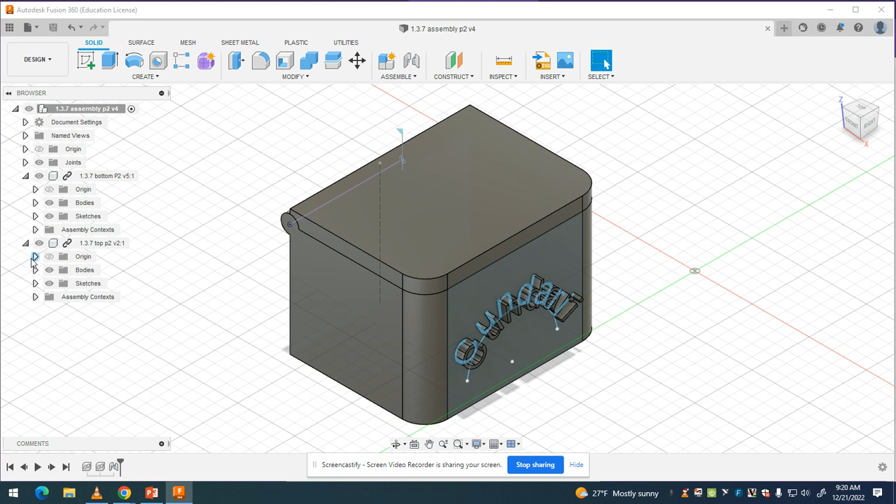All right guys, so what we're going to do here is, I can turn off this sketch. There we go, that looks better, right? Just turned off some sketches. So we're going to finish this up.

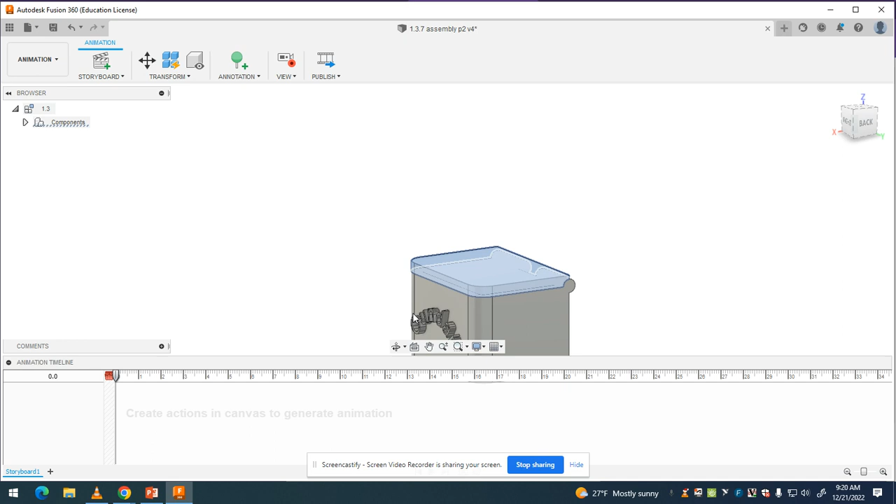So I want a technical drawing with an exploded view in it. That means something. So now that you've assembled everything and you're looking good, you're going to go over here to where it says design, that drop down, and you're going to go to what's called animation. I'm going to click on the house over here so that it zooms in and makes everything look pretty, because whatever direction you have this in is what it's going to be when you make it.

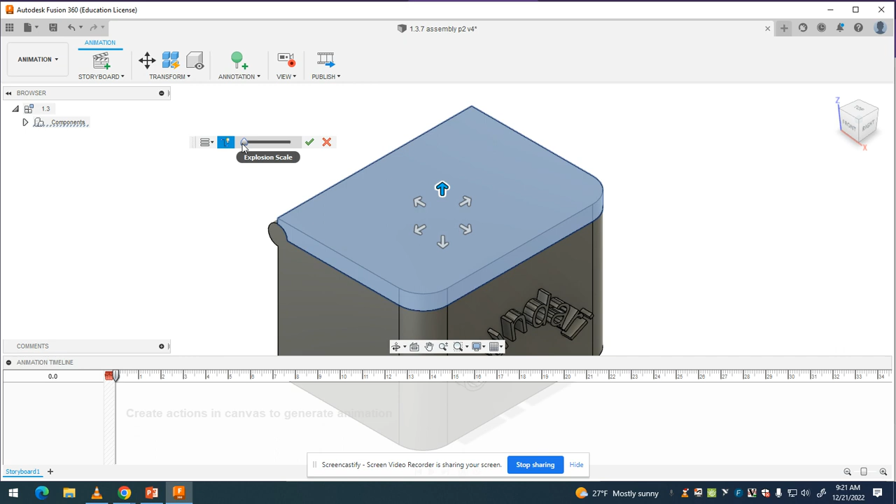You're going to go up here to this transform and down to manually explode, or manual explode, and you get these arrows. Now we want this to go straight up, so I'm going to click on the up arrow. And then I'm going to go over here to this explosion scale and zoom it up. Zoomy. And then hit check.

So if you had a bunch of parts, if you had screws and nuts and bolts and whatever, you would have all that stuff kind of sticking out. You could see where things go together. That's the point of an exploded view.

I'm going to hit save. This is important, you must hit save. Okay, now if I were to go back into design, everything would look normal, right? And then when I go to animation, I can see that that's where that's at.

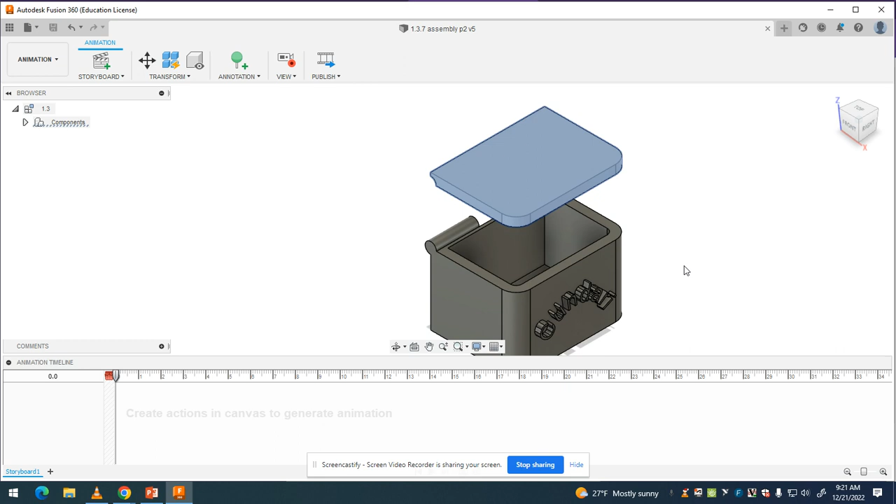So now I'm going to go here to drawing, and I'm going to say drawing from design. And if you did everything correctly earlier on in the year, you're going to come here and instead of from scratch, you're going to have your demo sheet option. If you don't have it, just do the from scratch. Okay, hit OK.

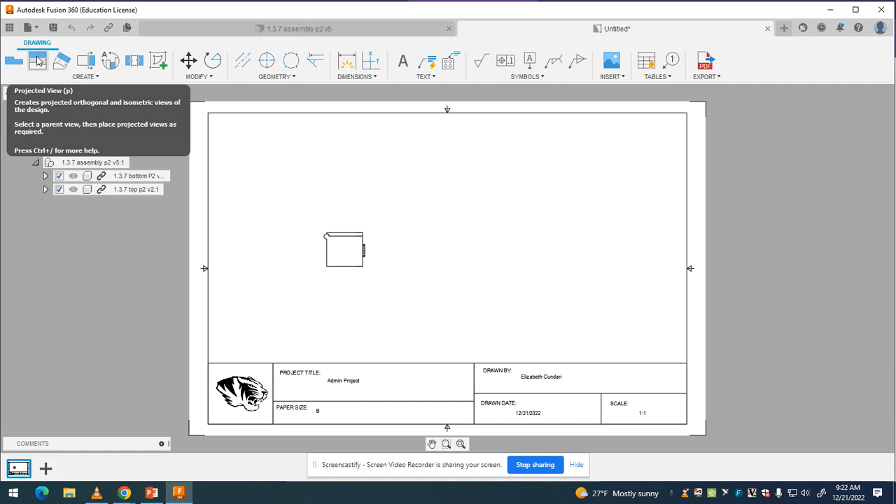And it brings in your drawing. Now mine has, it brought in my assembly right here. I'm going to go over here to, if it's just your base view and you have to click it down, just click it down. Go to projected view. I'm going to click on this original and then go straight up and then over.

I want to make sure that the one that goes over, I'm going to hit escape on my keyboard so that I'm done with that. I want to make sure my name is the one showing. So if it happens to be in the other direction, go left, okay? But I need the 3.

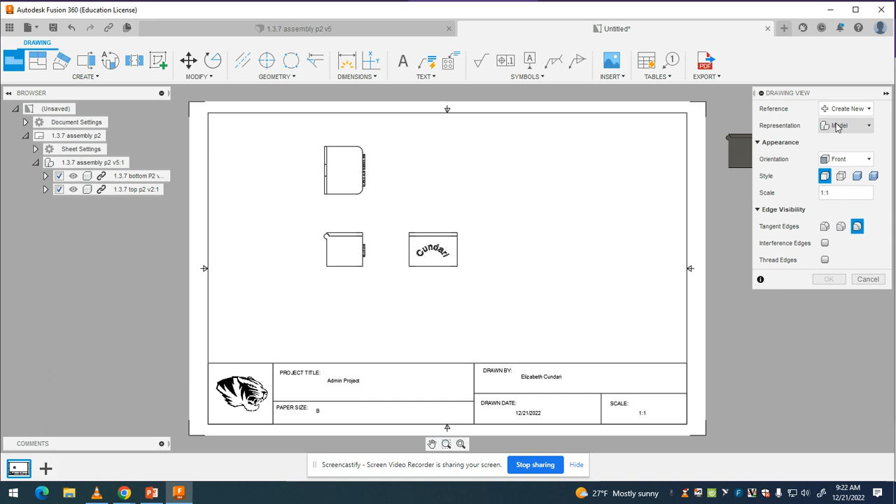And then what I want is I'm going to go back to that base view, click on where it says the model drop down and go to storyboard. And now I can bring in that exploded view that I did. See how cool that is? So hit OK, and now it's looking like a nice technical drawing that shows things.

Now there is one other thing that we have to do, you have to have dimensions. So go to your dimensions and then click on things to give you good dimensions. So like I might do left, right, this, I don't know, right, left, right. But straighten it out, oh I hate when it's crooked. Come on, there we go. All right.

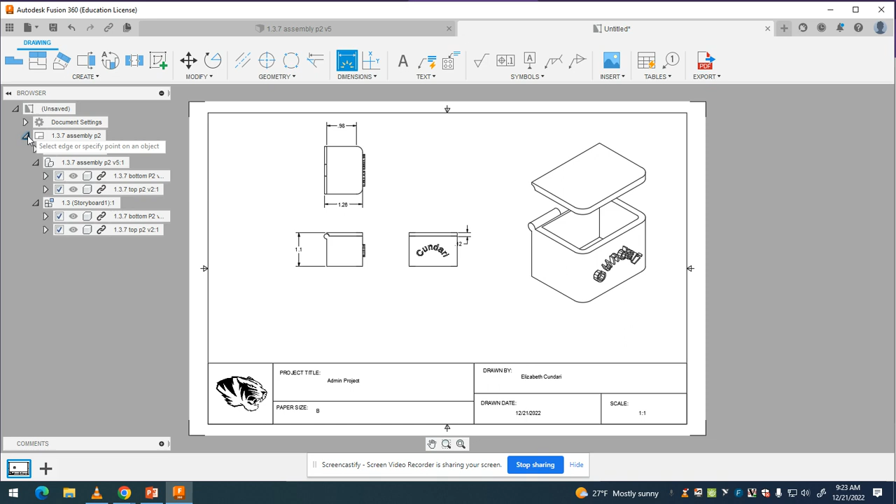Everything should have some sort of dimension on it. You can see my numbers are odd, it's because it's in inches. So I'm going to go ahead and switch that.

Everything looks good, or should. It didn't convert it, what happened? It's being weird. Ah, it was up here in units, I don't know what that other one was, I just changed it. That's okay, hit OK, there we go.

So now I got this 32 and this 28, see that's more what we were used to. So if I go here to here, 25, remember that? Here to here, we had 40.

Let's see, where would I get 30? On here, but I have the 32, 25. Maybe what I'll do is I'll get rid of this one. Ooh, that did something weird. Select this, delete. Go from here to here, that gives me my 30.

So all the numbers that we were working with, now we have numbers showing that go along and correspond with it. So it's just kind of a neat thing to do.

All right, so what you're going to do now is you're going to hit save. And when you hit save, it's going to bring in your drawing name, and then it's going to write drawing at the back of it. So hopefully you have assembly written there.

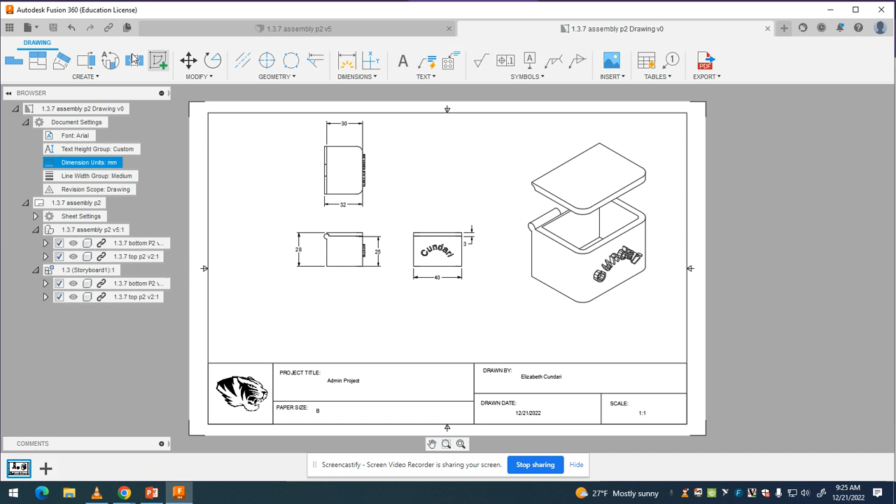This is what you're turning in for me, like what you're going to turn in. So you're going to go down to share, over to link, click here, wait, and then pop. Here comes your link. Click on the link.

And then if we go to, I don't know that I have the assignment up, but let me pull it up for you. So if I look here, it's this one, the pre-DPC, so it's saying we're doing this before we do something else. So if I go to the assignment itself, I can go to student view. So this is what you see, right?

So we're going to put that link right in here, hit submit, and you're good to go. All right, so that's the final part. That's doing the technical drawing aspect of it, and that shows that you know what you're doing. So good luck, guys.